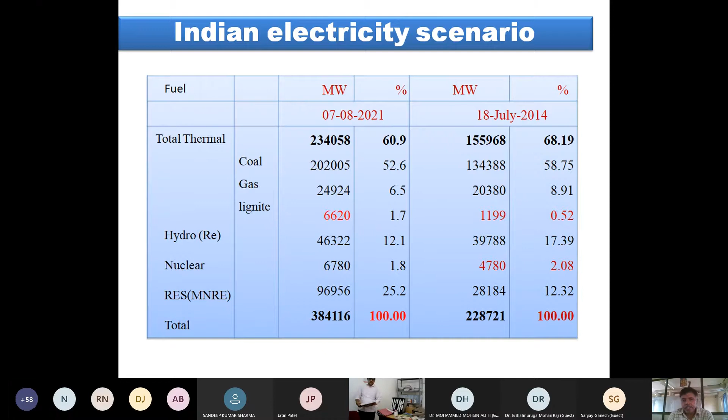Okay, next move to hydro. Hydroelectrical, very good. So in India, according to the level of melting of Himalayas, the height of Ganga - where it is coming from Himalaya: Alakananda, Mandakini, Gangotri, Yamunotri. After mixing of these four rivers, we can call it Ganga. The four Himalaya areas are melting and mixing near Haridwar or Rishikesh, I think Rishikesh, and we are calling it Ganga. The Himalaya height, maybe 3 kilometers from sea level.

How much mass of the water ice is melting, based on that calculation, the maximum potential of electrical energy generation in India across different river basins - maximum capacity is 1,48,701. Up to now we installed already 46,322. Maximum 1 lakh is possible.

That is for that construction, huge catchment area is required, huge investment cost is required. It is practically not that much possible to utilize the entire 1 lakh 48,000. Even though we utilize it, that is not sufficient to fulfill our needs.

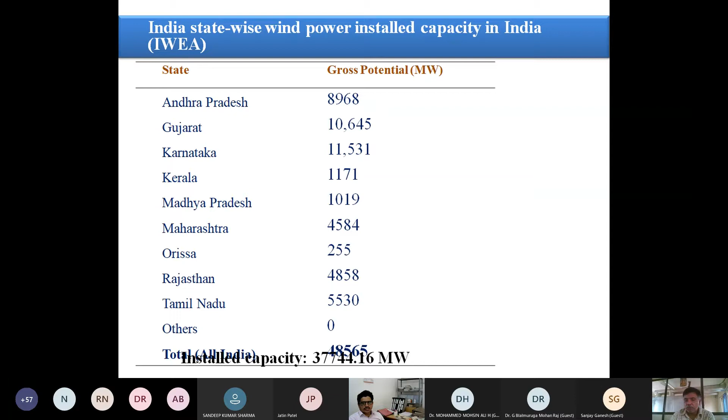Next, Tamil Nadu people very well know regarding wind energy. I think 100% windmills are available in Tamil Nadu - blade manufacturing, generators, 3-4 companies are available in Tamil Nadu. The total gross potential is 48,565. Now 37,744 megawatt is already installed.

Okay, one more option, biomass. That also has maximum capacity of 25,000. So only one opportunity is there, that is solar. In any other method, we are unable to fulfill the needs of future electrical utility. So solar is the only option.

Again, why solar PV is more popular and solar thermal is not popular, we will discuss later. First, solar is the option. So 87.5% of the solar energy we are using for agriculture, forest and housing industry - these areas already utilize 87.5% of solar energy. But in agriculture, the photosynthesis process maximum conversion efficiency is only 2%.

So using 10% of the area, we can produce 8 million megawatt. So even 10% is not required - 1% utilization of solar energy is more than sufficient for our future needs.

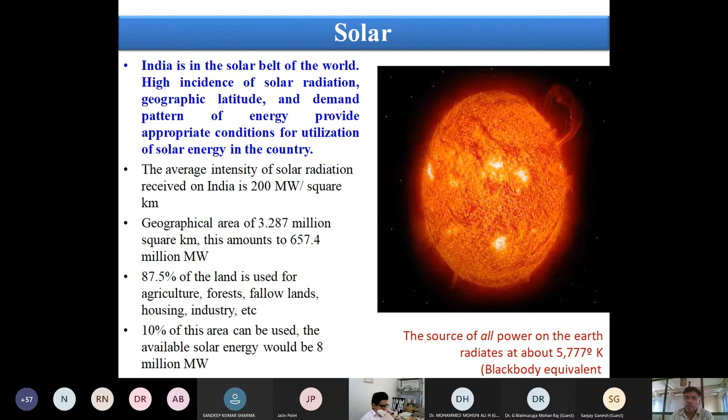So next, once we select a research area, after our PhD, for at least 10 to 20 years it has to be in the limelight, then we can do some work. Every year we can't select a new area. Whatever efforts we made for attaining the PhD degree, at that time itself we are selecting the burning topics, then we can continue our research in our teaching field also. So this is the main reason why I selected solar thermal.

Next, I selected the Exergy tool for that analysis. Before that, whenever we are teaching and discussing thermodynamics, two terms we discuss every time: one, perpetual motion machine of the first kind; second one, perpetual motion machine of the second kind.

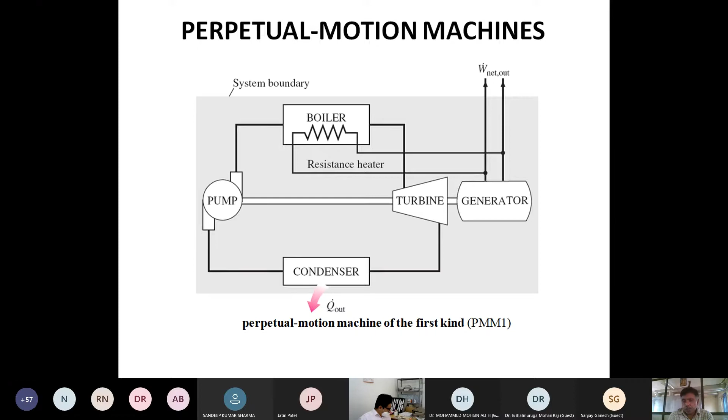So perpetual motion machine of the first kind means it is a violation of the first law of thermodynamics - energy is conserved, but here without input we produce output. That is the statement of perpetual motion machine of the first kind. So without input we cannot produce output - that's the first statement. Second one, perpetual machine of the second kind.

We cannot construct a single reservoir heat engine, or 100% efficiency is practically not possible in thermodynamics - from heat, low grade energy, to high grade energy conversion, 100% efficiency is practically not feasible. If we violate this, it's called perpetual motion machine of the second kind.

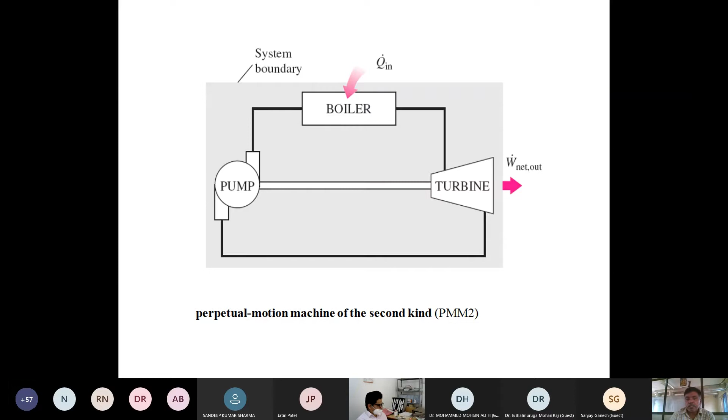So every time we are designing a system or proposing a cycle, we keep in mind energy must be conserved, and even if energy is conserved, whether it is practically feasible or not, the conversion efficiency must be less than 100%. Or if we want to construct a heat engine, at least 2 reservoirs are required. Not only that, the second law explains directional feasibility also.

A cup of hot coffee does not get hotter in a cool room, no doubt - it will cool in the cool room, but does not get hotter in the cool room. Second, by the paddle wheel we can generate heat - in Joule's experiment we are doing that, generating heat. But by supply of heat to the paddle wheel, we cannot generate mechanical energy.

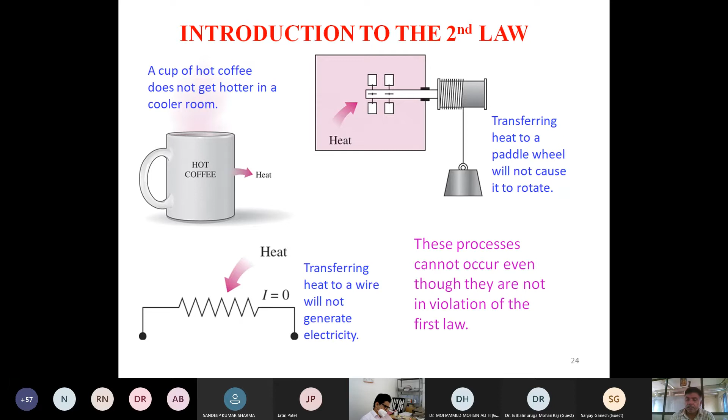By supply of electrical energy through the resistor, we can generate heat. But by supply of heat, we cannot generate electrical energy. So directional feasibility shows energy has quantity and quality.

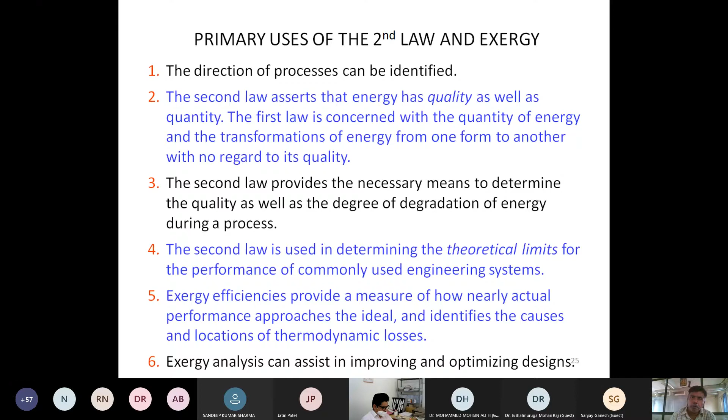Second law analysis can explain the theoretical limits of performance of commonly used engineering devices. Based on the second law, whatever analysis we are doing is exergetic analysis, meaning theoretical feasibility analysis - theoretically how much efficiency is feasible. In a practical case, we can estimate this by exergetic analysis.

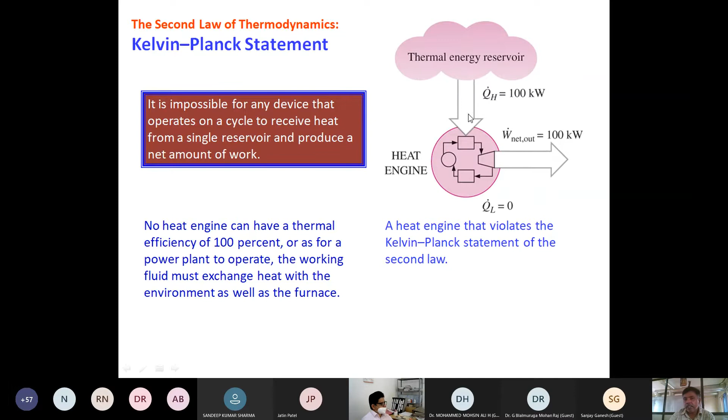As already stated, the Kelvin-Planck statement means we cannot construct a single reservoir heat engine. Next, the Clausius statement: heat cannot flow from low temperature to high temperature unless we are supplying some work through a pump. By using a pump, by external work input, only then can we transfer heat from low temperature to high temperature.

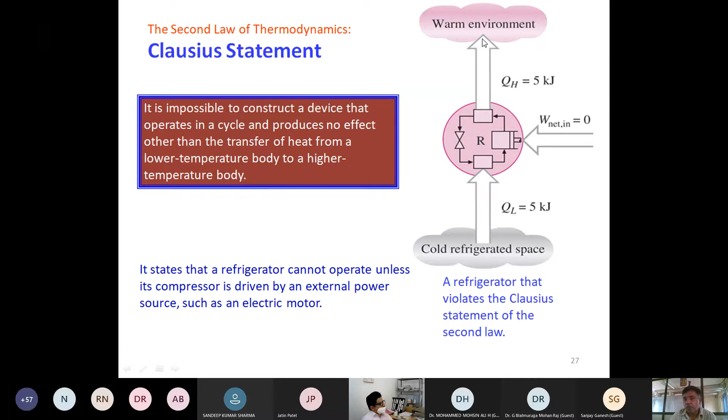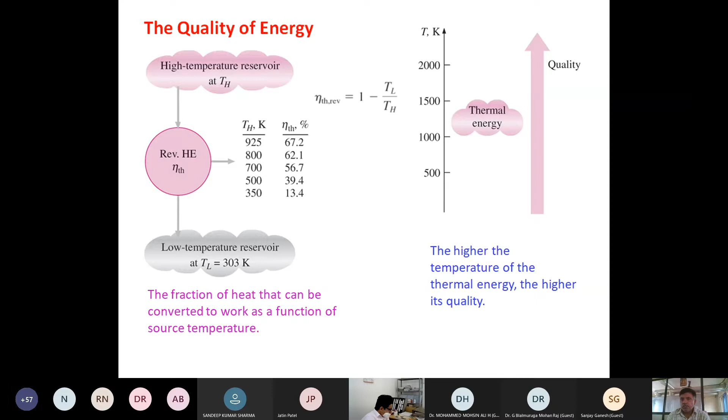Regarding quality of energy, generally as we increase temperature, the available energy is increasing, up to defining the Clausius inequality. Up to that point, if I am increasing temperature, the quality of energy is increased and efficiencies are increasing. But once Clausius realized in 1865 that this inequality is actually a property called entropy, the molecular disorderness - as we increase temperature, heat value is increasing, but molecular disorderness is also increasing.

This is the reversible case and the irreversible case. We are adding entropy generation.

That's why in power plants, in 1950 boiler pressure was 30 bar, in 1951. In 2009, I think 2008, the Reliance Anil Ambani Group made the first installation of a supercritical thermal power plant, with boiler pressure of 221 bar. But boiler temperature in 1951 was only 350 degrees. Now temperature is 580 degrees, with a maximum limit of 600 degrees only. The temperature just doubled, while pressure increased at least 6 to 7 times higher than 1950s pressure.

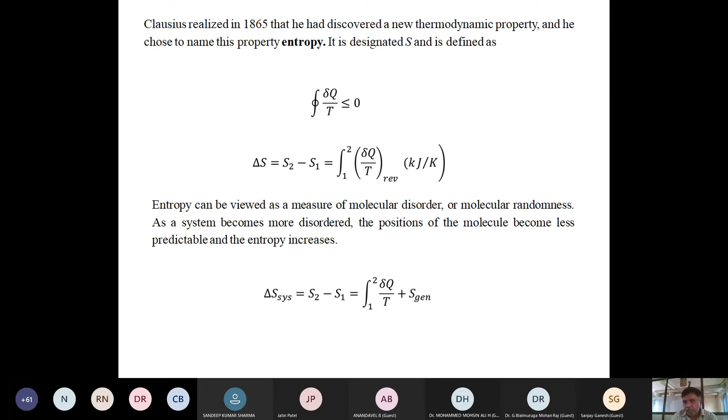Why? Because if I am increasing...

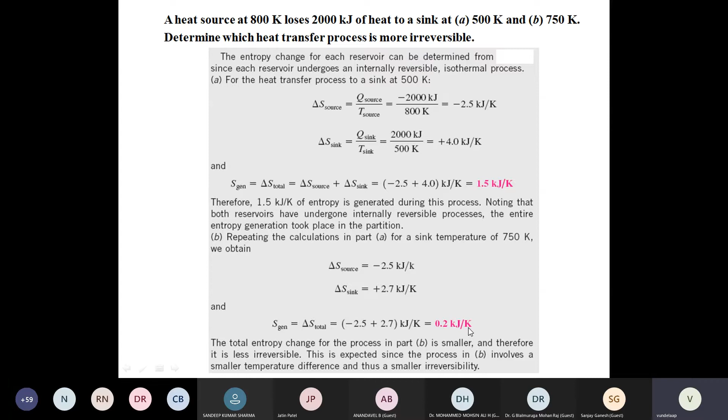So it means less temperature difference will give more available energy. That's why in olden days majority of water heaters were biomass based water heaters. Why? Because biomass combustion gives temperatures of 400 to 500 degrees, but the hot water temperature required is only 40 or 45 degrees. That much temperature difference is there, and because of that, we are losing more available energy.

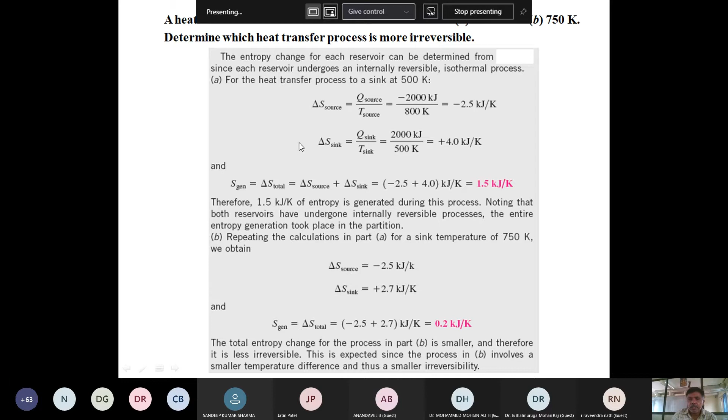That was replaced in the 1980s. MNRE, Ministry of New and Renewable Energy, introduced subsidies for solar water heaters. In solar water heaters, flat plate collectors or ETC tube collectors have temperatures of 50 to 60 degrees, while utilization temperature is 40. So reducing the temperature difference delta T means reduction of entropy generation will take place, and available energy is increasing. This is the second output of second law analysis.

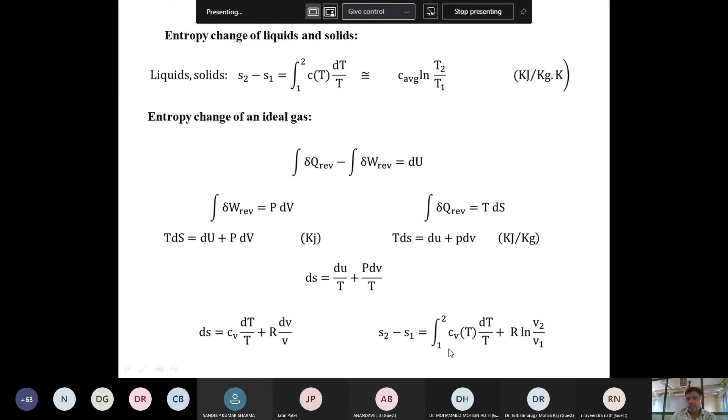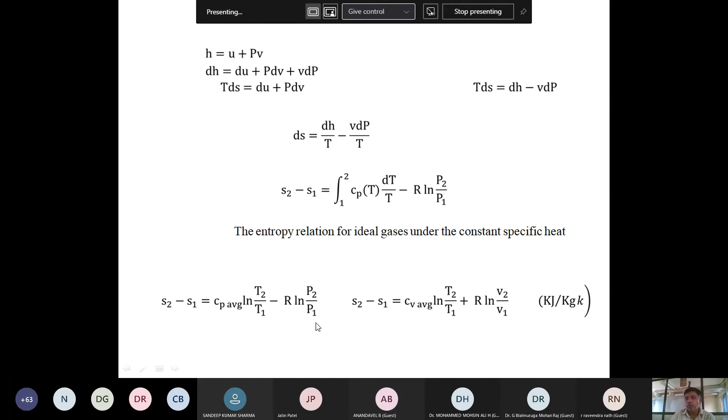Then, entropy for a reversible process - the equation of entropy we already derived for solids and liquids, and for non-flow gases in a non-flow process: integral of Cv into dT by T, plus universal gas constant R into ln(V2/V1). Or for a flow process: Cp into ln(T2/T1) minus R ln(P2/P1), for a reversible process.

For an irreversible process, some more generation term we want to add. So finally we reach why we selected second law analysis - it means we can achieve a realistic outcome based on the theoretical analysis. That's why we selected Exergy as a tool.

Then, what is Exergy? It is the useful work potential of a given amount of energy at some specified state. What is that specified state? For example, at 1000 degrees of temperature and 5 bar pressure, some energy is there - that is the specified state, relative to the dead state.

That state relative to the dead state means that is the environment state. That dead state condition is always changing, from area to area.

One best example I will give, it may be useful for explaining to students. Suppose a student has 10,000 rupees in his hand, pocket money like that, and wants to save it in different banks - he may move to HDFC Bank, ICICI Bank, SBI Bank, or Grameen Bank. Students commonly move between different banks.

So in any bank, if you have 10,000, they will open your account, no doubt at all. Then your energy value is 10,000 rupees. But after depositing, depending on the bank, the withdrawal capacity is changing. Suppose you open the account in HDFC or ICICI Bank, something like 4,000 minimum balance is required. So your available money is only 6,000. If you want to extract the remaining 4,000, your account has to close.

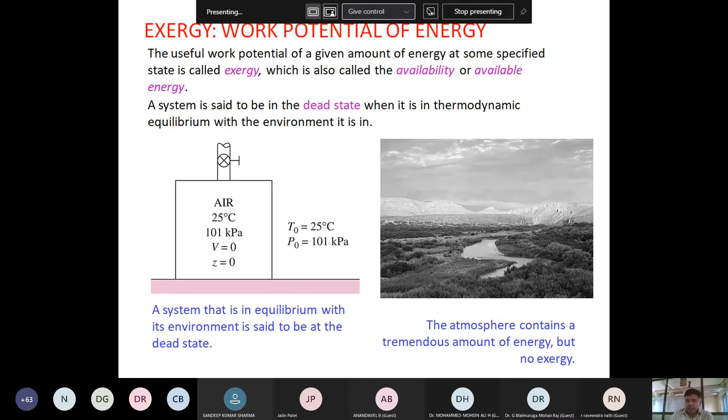So Exergy, best example, it's a combination of energy and entropy. Energy is the capacity to do work; Exergy is the capability to do work. Anergy is a non-available energy. How we calculate that energy is important. Whether that non-availability can be reduced by changing the process or not, that testing is required. That's why we are doing exergetic analysis for all thermal systems: for changing to a different process, how we can reduce the unavailability.

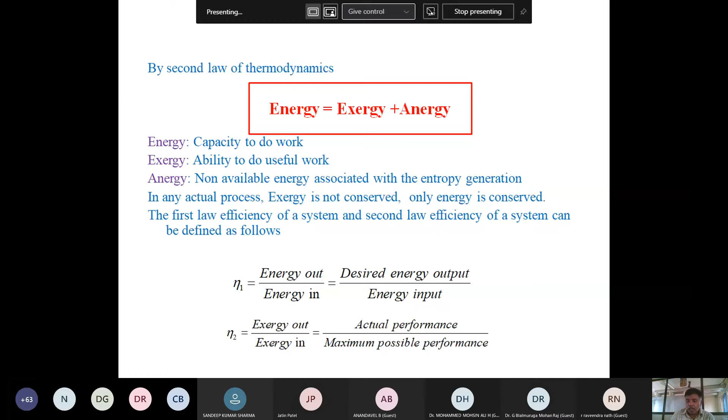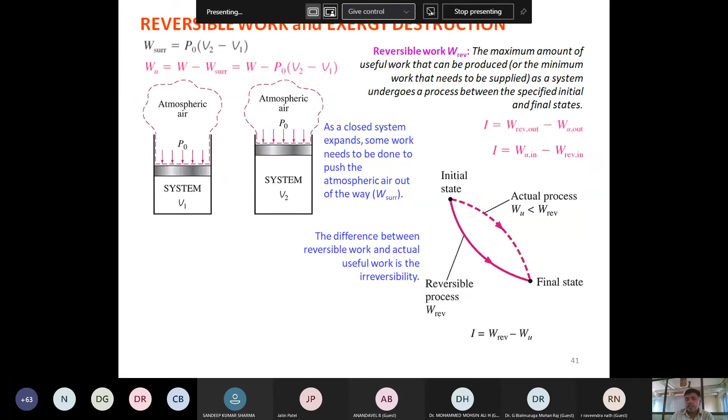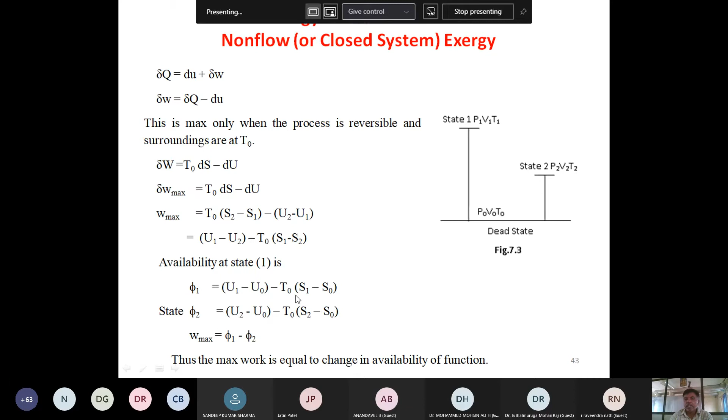These are the efficiency equations. All the equations are there. So energy is conserved, entropy is generated, exergy is always destroyed. For high grade conversion of energy, like potential energy to mechanical energy, the unavailability is negligible. For a non-flow process, the available energy considers internal energy: internal energy of current state minus internal energy of dead state minus T naught into entropy of current state minus entropy of dead state. If you consider the piston work done, then we subtract P naught into V2 minus V1.

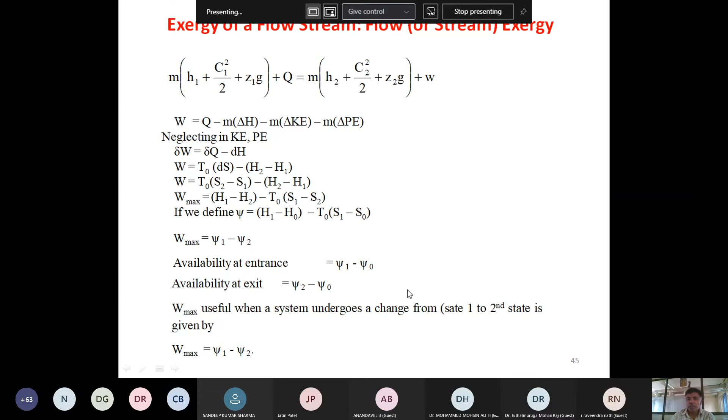For steady flow process, which we mostly use for power plants, the basic equation: mass with some energy is entering. For entering, it performs some work on the system, so flow work, internal energy plus PV, enthalpy, kinetic energy, potential energy. If you supplied heat, again some mass is leaving the system with enthalpy, kinetic energy, potential energy. If by leaving they performed some work, then we add work. This is the steady flow energy equation based on the first law of thermodynamics. The Exergy equation is the same for availability from state 1 to state 2; the only difference is the maximum useful work. This basic equation we are using for analysis of power plants.

So you see how we calculated the Exergy. Suppose solar energy is available at 5400 Kelvin temperature. Then it reaches the earth, and we are consuming it in different processes. Some loss is taking place. This loss maybe we can avoid by changing the process. In our analysis we can cross verify how we can change the process to reduce the losses.

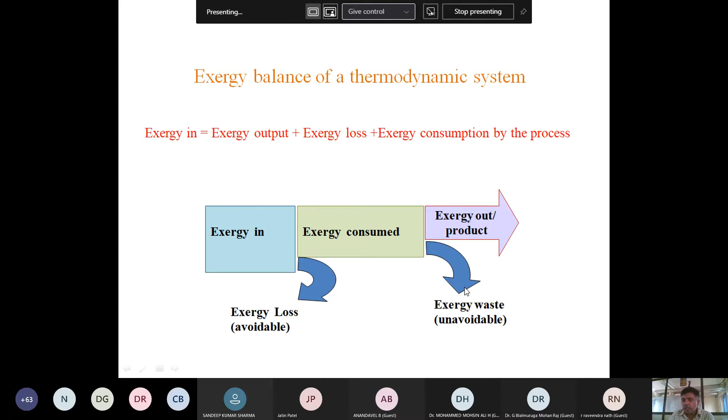The second one is Exergy wastage to the ambient. This one is unavoidable. Why? Because the ambient condition is also the dead state condition, and our Exergy loss is also at dead state condition. This is unavoidable; this one is avoidable. How we can avoid it, we can explain. These are the equations, everything available in our papers. You can search Exergy, maybe V. Siva Reddy or SC Kaushik, like that. You will get the publications.

Now, I think that's why we selected the Exergy tool and why we selected solar. Move to today's topic, exergetic analysis of a solar thermal power plant. Here we selected a 50 megawatt parabolic trough solar thermal power plant.

This one in 2009 I started the analysis. I think in 2010 or 11 I published the data. At that time in India there was no power plant. So from published data only we selected the parameters, the design parameters. And for the Indian atmosphere, from NREL, National Renewable Energy Laboratory, the last 4 years of solar data is available. Anyone can download it. By using that data only, we analyzed this model.

We placed the data for a high solar intensity area, Jodhpur, and a low solar intensity area, Delhi, because at the time I was in North India, so I selected the two areas. First of all, generally in a parabolic trough, what we call a collector is a combination of modules. You see, these are the modules, 12 modules. One collector is a combination of 12 modules. For one module width we selected the commercially available width of 5.76 meters.

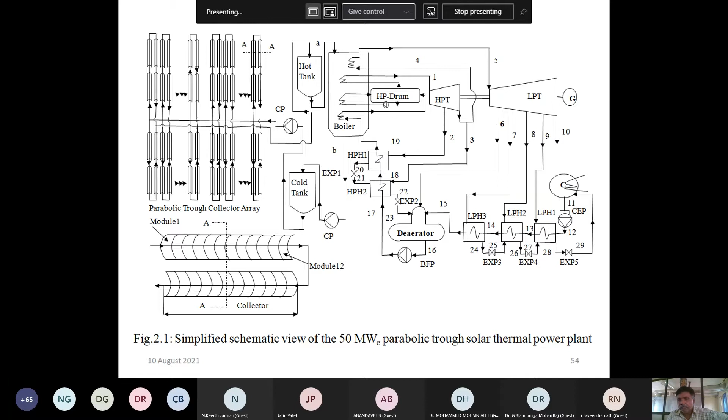This is the general thermal power plant. You see, a reheat, regenerative, superheated Rankine cycle thermal power plant. Not supercritical; superheated, reheat, regenerative. For the regenerative operation, two high pressure regenerators, one open regenerator for deaerator purpose, and three low pressure regenerators. And reheating: after the high pressure turbine exhaust, we reheat the steam for further expansion in the low pressure turbine, reducing the moisture content in the end stage of the turbine blades. This is the single one.

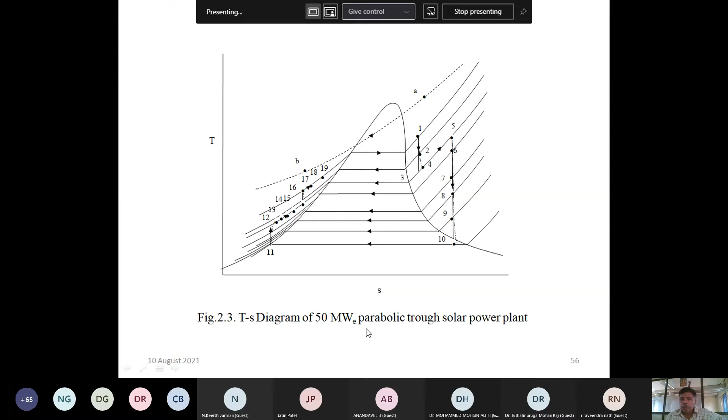Receiver, evacuated tube. These are all data collected, and this is the TS diagram of the 50 megawatt parabolic trough solar thermal power plant. The basic equation I already mentioned, only the steady flow energy equation we are using for determination of the power plants. Here, the main beauty of the analysis: we considered reduction of the load and the reduction of performance efficiency from a 1958 publication, how the high pressure and low pressure turbine efficiency will reduce, how pump efficiency will reduce, and how generator efficiency will vary with the load. Realistic output is our target. By theoretical analysis, we want to achieve the realistic performance efficiency.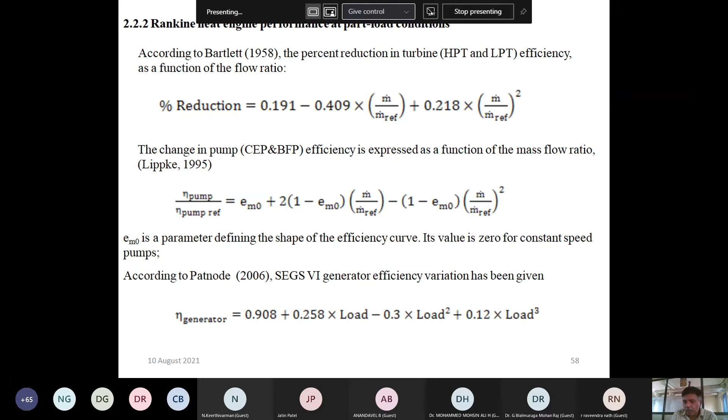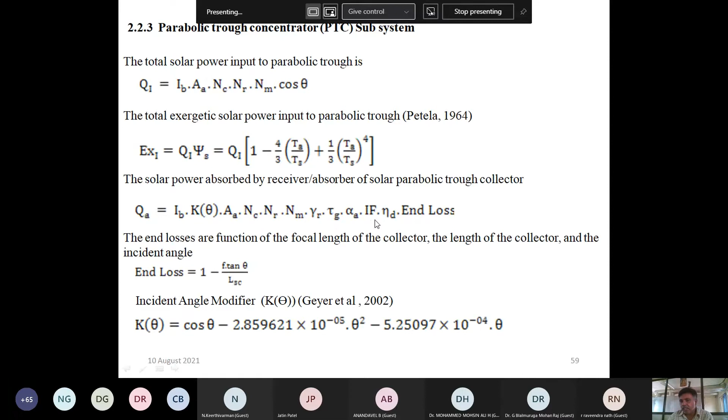Then this is the heat from the source of solar beam radiation. We all know for concentrated collectors we use only beam radiation; for flat plate collectors we use diffuse radiation. And the area of the collector, number of collectors, number of rows, number of modules per collector. Generally we selected 12 modules, universally accepted; the majority of power plants contain 12 modules only. And the cosine losses. Then the exergetic input value of the source; Petela published this equation in 1964, and we use that one. Then how much is absorbed, reflectivity, transmissivity, absorptivity, and end losses. Everything we considered.

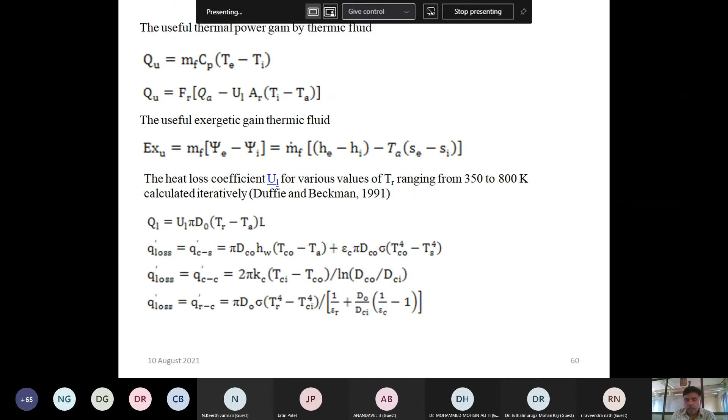So this basic model, the same total paper I published in, I think, Energy Journal, you can cross verify. For the design considerations, at the time we considered 2009 published data: absorber tube outer diameter is 70 mm, absorber tube inner diameter 65 mm, glass envelope 115 mm, and glass envelope inside diameter 109, so the thickness of the glass is about 6 mm.

And for Jodhpur, as I mentioned, high solar beam radiation of 870 watt per meter square, so the number of collectors we selected was 4 per series. For the same system installed in Delhi, we increased the number of collectors to 6 because the average solar beam radiation availability is only 620. The width of the module, as I mentioned already, is 5.76. The length of every module is 12.27, but the mirror length is only 11.9. The ambient temperature we selected is 304, and the incident angle, and the focal length is 1.71. The tracking system is a hydraulic drive.

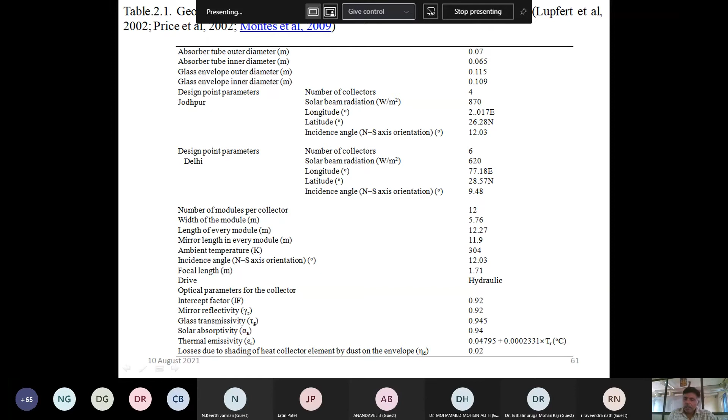Next, mirror reflectivity, glass transmissivity, everything in a realistic manner we consider. Next, the power plant operating parameters you can see. The extraction at the end of the first stage, second stage, third stage: 2 high pressure regenerations, 1 open feed water heater, and 3 low pressure regenerations are there.

For extraction, where it is extracting, the percentage is 0.5 into high pressure, and at the end one stage is completing. After the stage only we can extract the steam. Next, after the next stage of the extraction, like that the extraction percentages of the high pressure, the extraction stages are there. Given any designed power plant, you open the design data book of power plants, you will get it, because the exact pressure they will not give. If I change the high pressure, the extraction pressure is also changing.

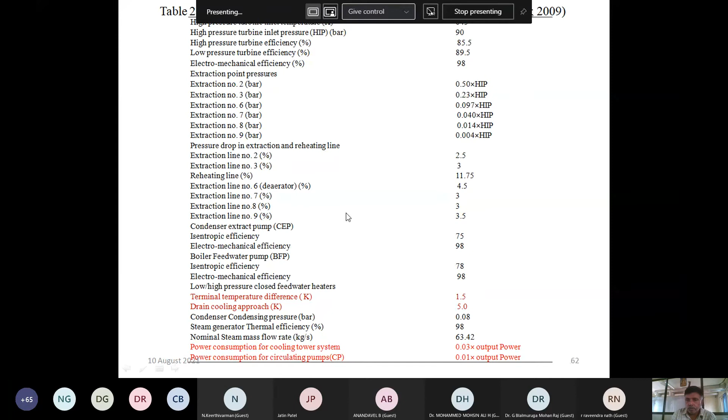So that is only the collected data. I did not do anything. Whatever the 2009 published data is there from the journal, I developed the model and did the exergetic analysis and energetic analysis. So the collector receiver area has low exergetic efficiency, and the overall plant efficiency, the energetic efficiency, is 24%. The exergetic efficiency is 25.81.

Generally, exergetic efficiency we expect to get a lower value, but according to the Petela equation, solar energy at the source is a high value, 5400 Kelvin, but when it comes to the earth the value is reducing. Because of that only a slight variation of the exergetic value is coming. Then whatever the model, why? Because practically there is no validation, but theoretically, first model validation is required. Our model compared to the published data, we got almost nearer values.

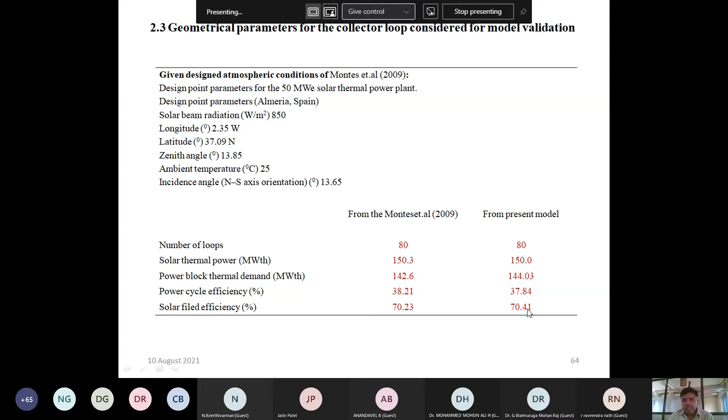So then we want to do modifications. What are the modifications that can take place? Already I mentioned we can't increase the temperature. If you increase the temperature, the available value is reducing. So we can increase the pressure. The possible allowable increase of the high pressure we calculated. What is the limitation?

The end stages of the turbine blades, the dryness fraction. That is our target. More than 0.9 dryness fraction we want to maintain. Wilson line, we call it the Wilson line in power plants. If you maintain more than that dryness fraction, damage of the turbine blades we can eliminate.

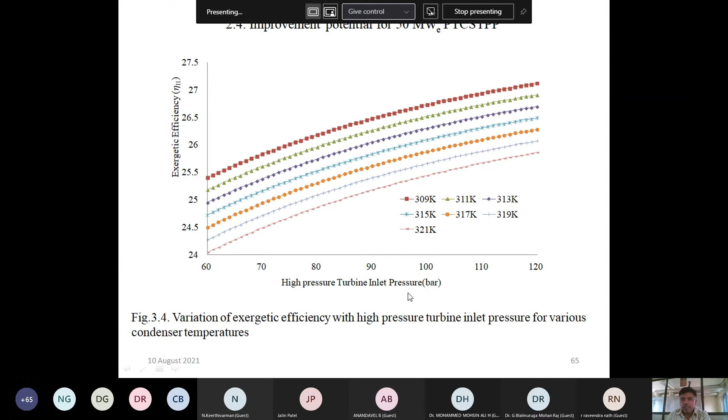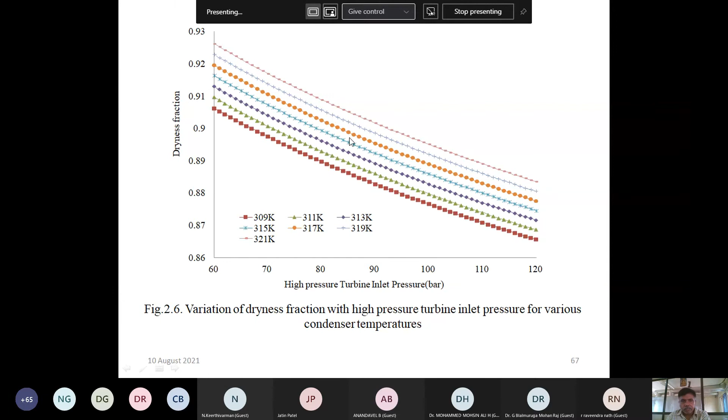So with that target, we analyzed different sink temperatures: as we increase the high pressure turbine pressure, how the exergetic efficiency is increasing, and how the dryness fraction is reducing. So the optimum turbine pressure: in the earlier condition, the published data is 90 bar pressure. Now up to 105 bar pressure we can increase without changing any operating parameters. Then we extracted the operating parameters at each stage of the extraction process, and we determined the entropy, exergy value and energy value.

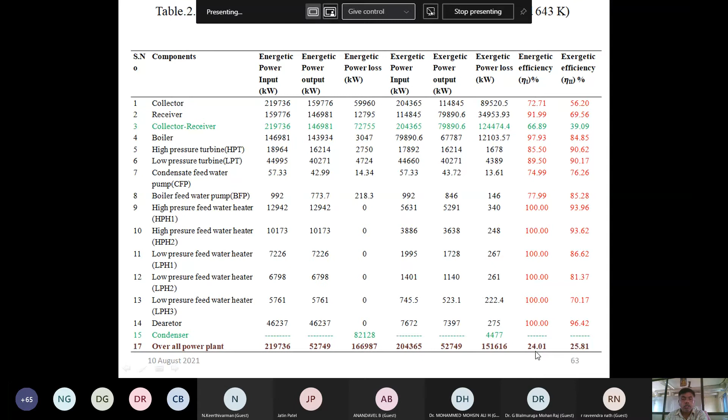Then we calculated the overall efficiency of the power plant. The overall efficiency of the power plant we got is 26.2. The energetic efficiency is 24.75. In the earlier condition, the model is 24 and 25.81. So almost 1.2 to 1.4 percent of the efficiency we increased by enhancing the inlet pressure.

This enhanced efficiency power plant cycle, if I run it in the location of Jodhpur, this is the Jodhpur solar radiation variation from morning to evening, so 8 a.m. to around 8 p.m., but up to maximum 5 to 6 p.m. is more than sufficient. So how the solar radiation varies per month, you can see in the month of August less solar radiation we are getting. The peak solar radiation we are getting in the month of February.

Generally we assume high solar intensity will come in summer, but in general high solar intensity comes in winter, but the length of the solar day is less in winter. Why we get high solar intensity in winter is that condensation of the polluted particulates takes place in winter. So a clear sky condition will occur at noon time.

So the solar constant is not changing. 1353 watts per meter square of beam radiation is coming from the sun to earth. If clear sky, zero pollution, at that condition we can get the highest beam radiation. But that highest beam radiation possibility is only available at Jodhpur. You can cross verify the solar radiation data on the NREL website.

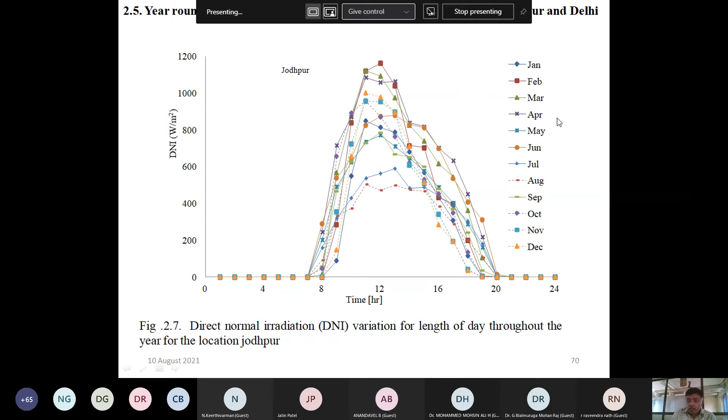Next, the wind velocities, the dry bulb temperatures, how the dry bulb temperatures are changing the entire day. Next, Delhi. Delhi also like that. You can see in Delhi in November we are getting the peak solar radiation. There, February we got the peak solar radiation. Here, November we got the peak solar radiation, and least in August in both cases, because in monsoon conditions, August has the least beam radiation due to high cloudy conditions. These all values are beam radiation, not global radiation. So beam radiation availability in August is very less.

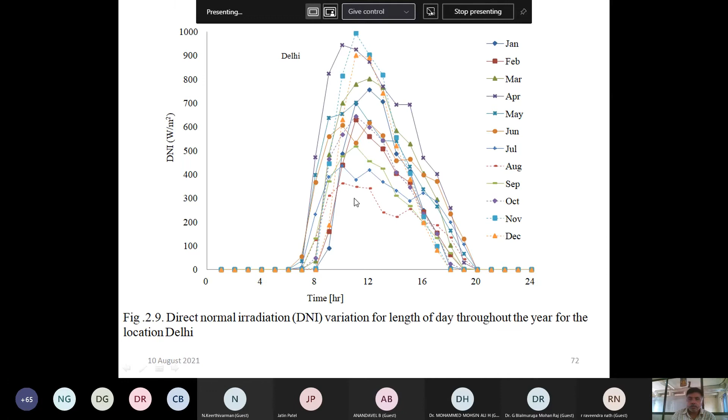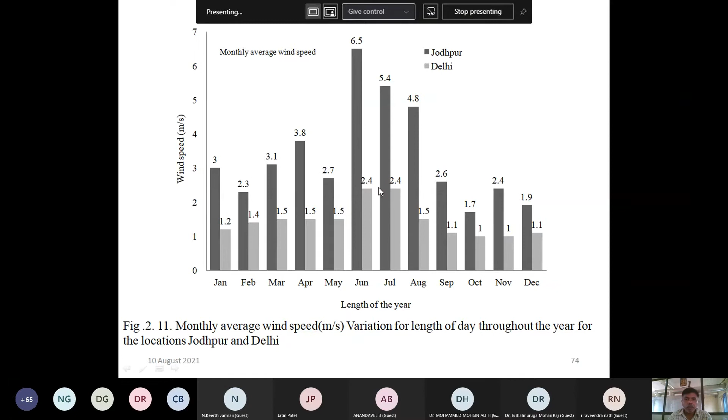Then monthly average wind speed. In Jodhpur, the collectors are reduced for the same 50 megawatt production, but the drawback of Jodhpur is that wind velocity is high. So the structural cost of the collector is increasing in Jodhpur compared to Delhi. Delhi wind velocities are very low compared to Jodhpur. Jodhpur wind velocities are high.

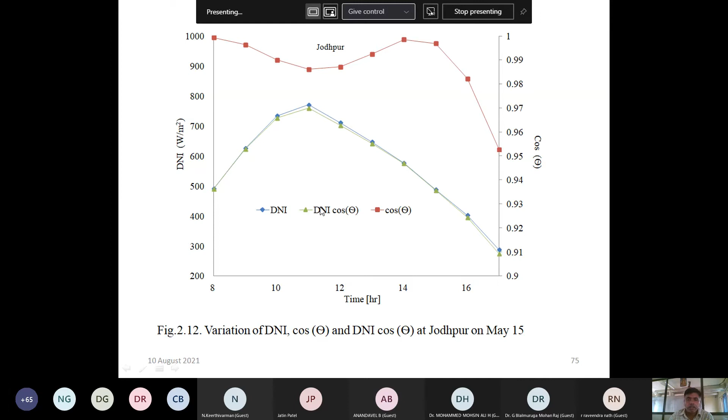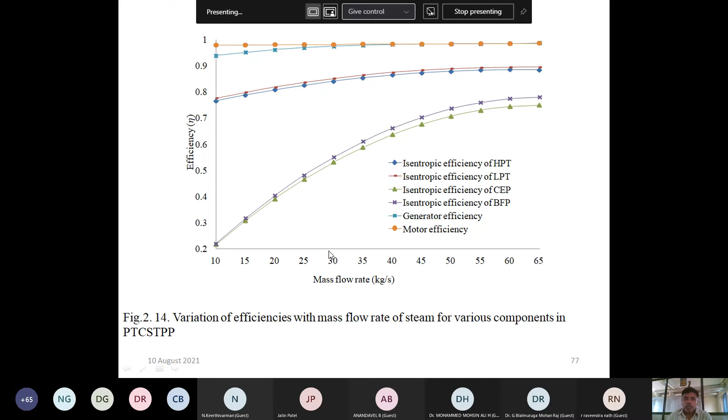Then after considering cosine losses, what is the end beam radiation? Why? Because we are doing single axis tracking for the parabolic trough. That's why we want to consider the cosine losses for Delhi also. Then efficiency variation of the high pressure turbine, low pressure turbine, boiler feed water pumps, generators and motors. What is the efficiency variation with respect to load? Load means the mass flow rate of the circulating fluid. We are changing it, so load will change. According to load, the variation of the efficiencies we considered.

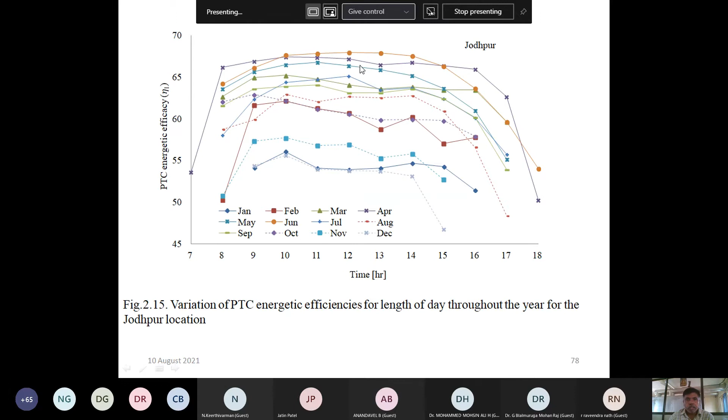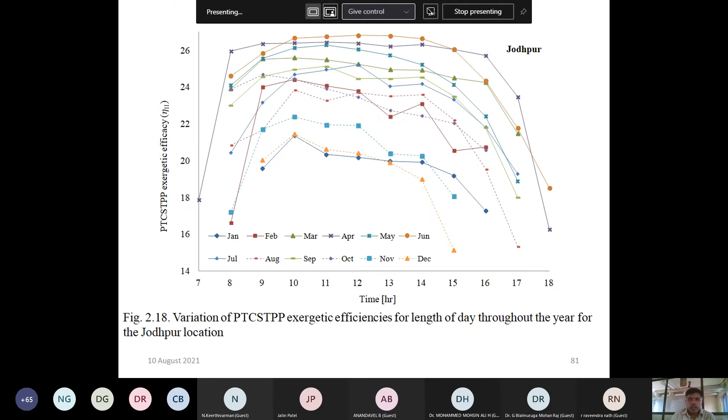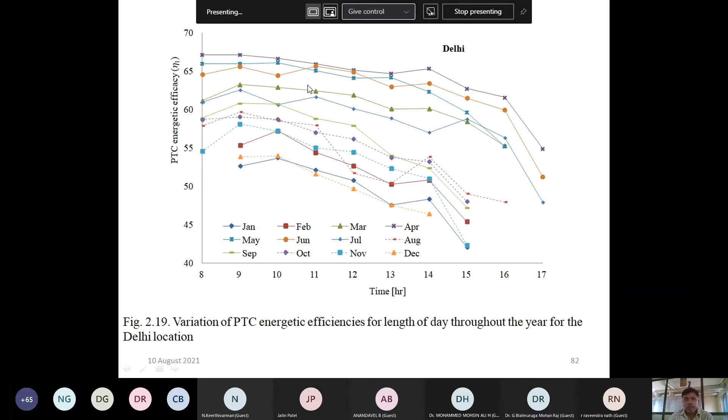Then we calculated for the entire year the efficiency variation of the parabolic trough, the energetic efficiency and exergetic efficiency. In December, you see very low. Next December, November, and October. The high we are maintaining in June. April, May, and June, high efficiencies we are achieving for Jodhpur. Total plant efficiency is also calculated. This is the total plant efficiency. Coming to Delhi, Delhi also in April, May, June. These 3 months, the length of the day is high and overall efficiency is also high in both conditions.

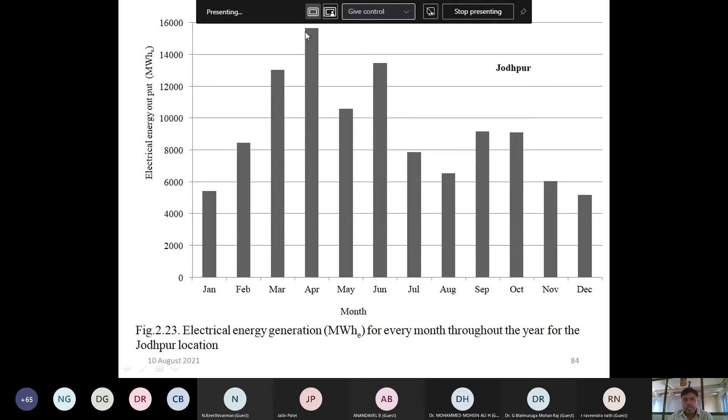Next, the electrical energy generation capacity. These all are theoretical analysis. The electrical energy generation capacity month wise: March, April, May, June. These 4 months we are getting high electrical energy generation units. Here also April. In both cases, in April the length of day is high and the solar radiation is also at the design value, for Delhi 650 watt per meter square and for Jodhpur more than 850 watt per meter square. So that's why in April we are generating high electrical units.

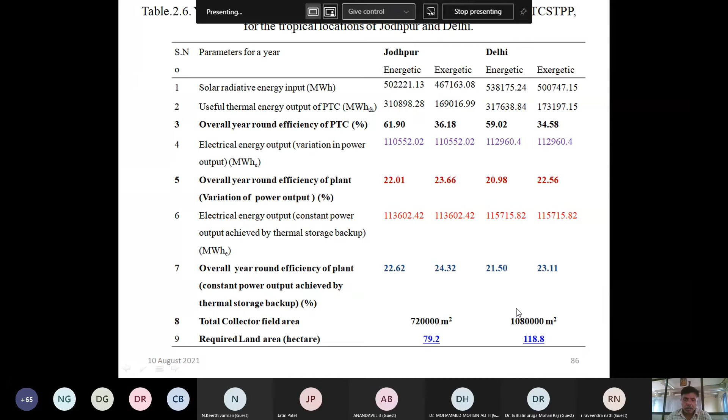So the comparison of Jodhpur and Delhi, the variation of the efficiencies, the year-round efficiency. The designed efficiency of the modified parabolic trough system: exergetic efficiency is 26%, energy 25%. But for year-round running, the overall efficiency of the plant is reducing because in August, September, the operating temperatures are reducing. But the average overall year-round performance of the system is this one. And total land area requirement: for the same 50 megawatt power plant at Jodhpur, 80 hectares of land is required. For the same capacity at Delhi, the land area requirement is high, 120 hectares. So efficiency, number of units generated and land area requirement we calculated.

Next, any analysis will not be complete if we are not publishing the economic analysis. Unit generation cost is important. If we publish data without unit generation cost, there is no use. Even though your efficiencies are good, if the unit generation cost is going to 20 rupees or 30 rupees, no one is ready to accept your analysis. So that is the main important thing. Then we did economic analysis of the solar power plant. Here we calculated the unit generation cost.

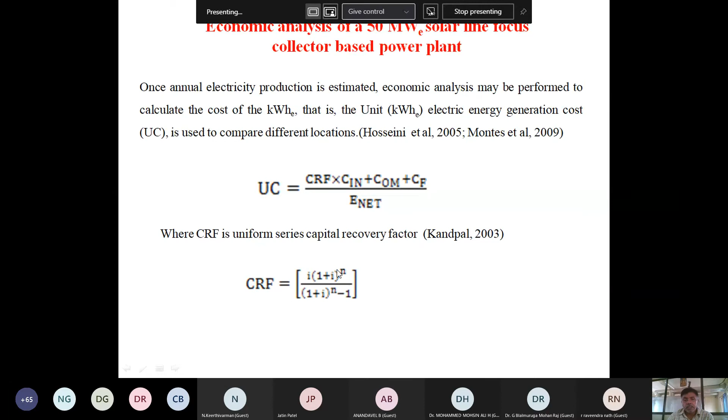This is the CRF, the capital recovery factor, proposed by Kandpal, IIT Delhi professor, in 2003. It is i into (1 plus i) to the power n, the life of the plant, divided by (1 plus i) to the power n minus 1. This is the capital recovery factor. Capital investment, operation and maintenance investment, and fuel investment divided by how many electrical units are generated gives the unit generation cost. Based on the CRF, the unit generation cost increases. If the interest rates on the money we borrowed are high, unit generation cost will increase. If the life of the plant is low, unit generation cost also increases.

So here, the System Advisor Model. This is also on the NREL website. From the tool we can extract the data, such as site improvement cost per meter square, the general cost of the collector, storage system, and the power plant cost. These values I extracted from the System Advisor Model, available at the National Renewable Energy Laboratory. Then I know the site area, and for Jodhpur and Delhi, what is the cost.

Indirect cost also. Engineering, procurement, construction cost, generally the limit is 11% of direct cost. This is our Indian power plant benchmark cost analysis, 11% of direct cost. And project, land and miscellaneous costs, generally 2% of direct cost. Then this is the total direct and indirect cost of power plant installation for Jodhpur and Delhi.

Next, operation and maintenance cost. These are also fixed costs and variable cost by the generation. The fixed cost is 3,500 rupees per kilowatt per year. 3,500 rupees we want to spend on operation and maintenance cost. And variable cost by the generation, 150 rupees per megawatt hour. So this operation and maintenance cost we calculated. Then the total megawatt operation and maintenance cost is this much.

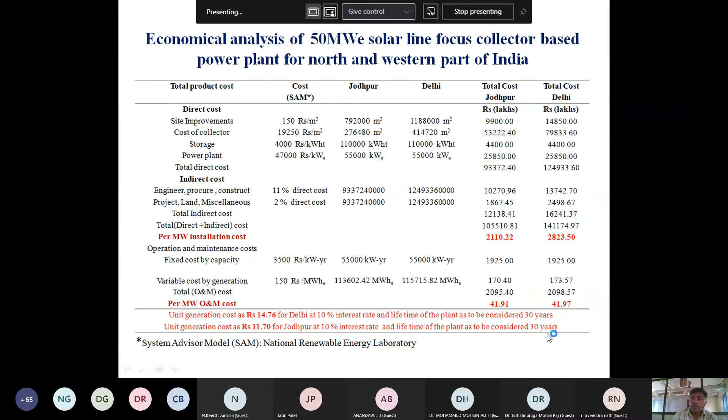Then the unit generation cost we calculated. For Delhi, 14 rupees 76 paise at 10% interest rate and 30 years life. For Jodhpur 11.7 rupees, 10% interest rate and plant life 30 years. And I have not considered any government subsidies or import duty exemptions. In a realistic manner, if anyone constructs the 50 megawatt plant, then what is the electrical energy generation cost?

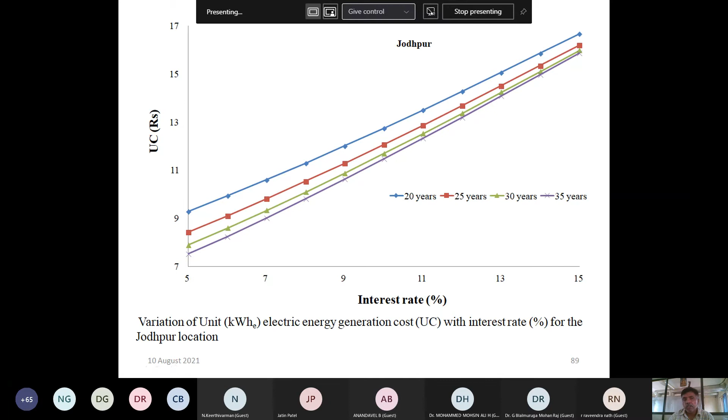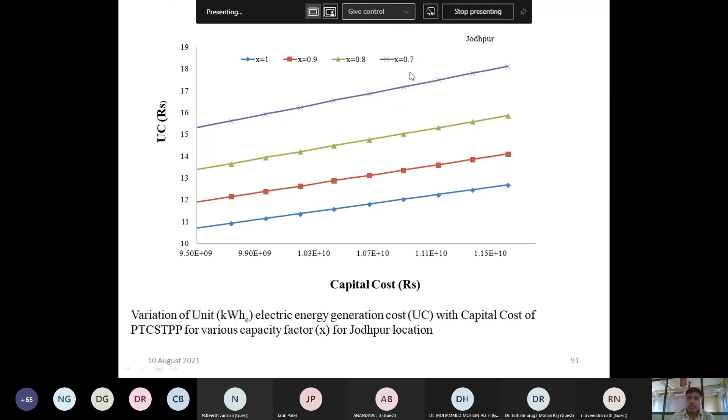This one is also published in the Renewable and Sustainable Energy Reviews journal, the economic analysis also. So how unit cost is varying with respect to interest rate, I already mentioned. Interest rate and capital cost, with the load factor: if it is running at 100% load, 90% load, 80% load, 70% load, operation maintenance cost, capital cost.

So finally the conclusions are, at 10% interest rate, a normal acceptable rate, and 30 years lifetime, parabolic trough unit generation cost if we installed in Jodhpur is 11 rupees 70 paise and in Delhi is 14.76. But at present, in 2021... I analysed at the time of 2009, solar PV power plants unit generation cost was 14 rupees. The Indian government was ready to purchase at 14 rupees.

Later it reduced to 7 rupees. Now the solar PV power plants unit generation purchase is 2 rupees 65 something. Drastically reduced. At that time we compared with solar PV also in 2009, not now.

Then same method, there are solar concentrated systems of 3 types: parabolic trough, parabolic dish, and central power tower. Central power tower is nothing but a big split dish. That's all. From far it's a point-concentrated parabolic dish only. The central power tower uses heliostat plates. One reflector area is 10 meter by 10 meter. All reflectors maintain dual axis tracking, and at the center the receiver is there.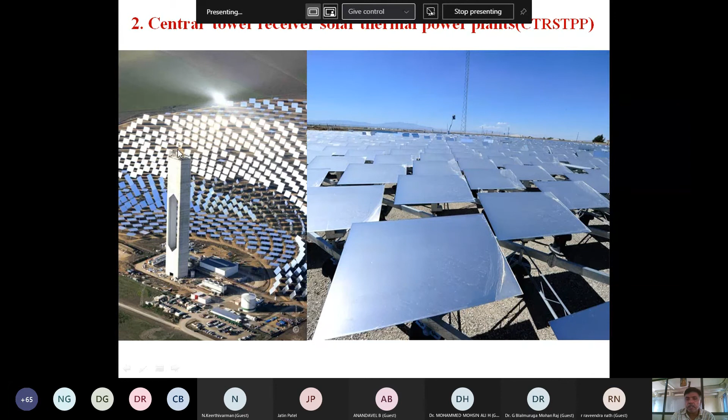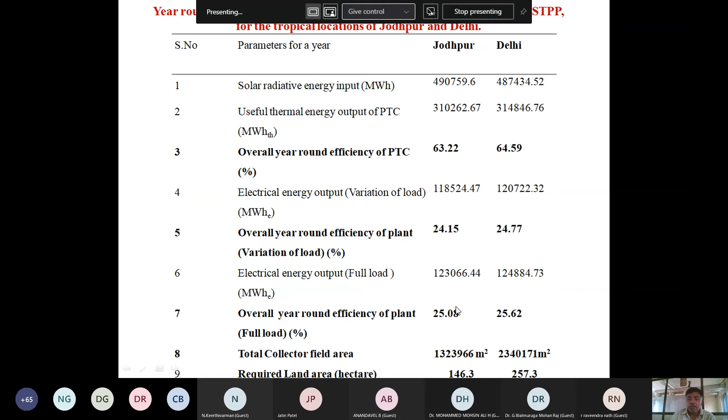That 20 to 30% is reduced beam radiation, further reflection means further reduction is taking place. But for comparison purposes we analyzed the system. If we run a 50 megawatt system in Jodhpur and Delhi, the land area requirements are increasing drastically compared to parabolic trough.

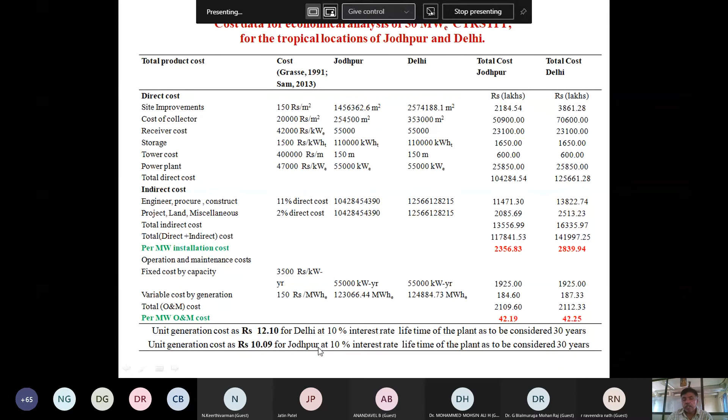But overall plant efficiency is increasing and the unit generation cost is reducing. Delhi is 12 rupees and Jodhpur is 10.09. I fixed the interest rate and number of life of the plant.

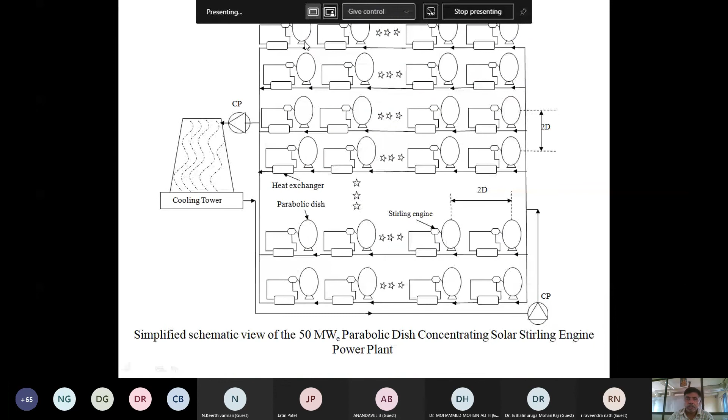Then parabolic dish system - why? Because IOCL in India is the only organization working on parabolic dish Stirling engine based power plants, a 25 kilowatt system with a single unit capable of running 25 kilowatts. IOCL is doing major research on the engine, reflectors, structure and structural resistance, associated with IIT Bombay and other R&D organizations. So in that condition, we are connecting 25 kilowatt parabolic dishes in series and parallel to achieve 50 megawatts.

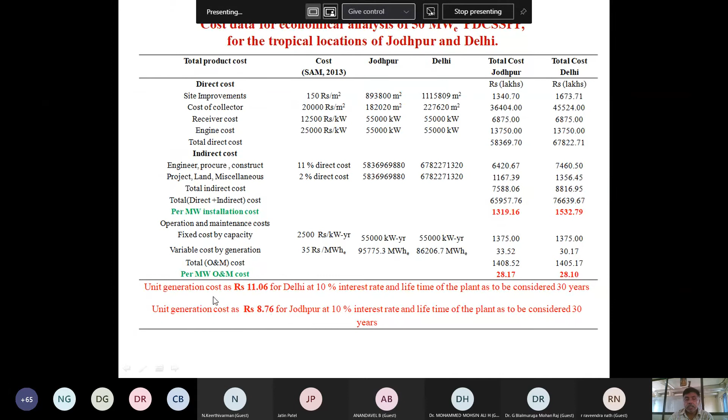For comparison of unit cost generation and land area - this is the land area requirement. The unit generation cost is very low compared to parabolic trough. Jodhpur is 8.76 and Delhi is 11.06.

So the final conclusions by analysis of parabolic trough, central power tower and parabolic dish: unit generation cost of parabolic dish is very low and land area requirements are also moderate in parabolic dish, especially in India, not overall. The installation cost is too high - 21 to 28 crores for parabolic trough, central power tower 24 to 29 crores, and parabolic dish 14 to 16 crores. That's why IOCL majorly concentrates on parabolic dish.

So by this analysis we concluded solar alone is not practically feasible because the unit generation cost is too high. Then what can we do? If solar is my target to utilize solar energy for power generation, solar alone means it consumes more land area. Second, the efficiencies are low and the investment cost of the power plant is high. So no one will come forward with our proposal.

Then we cross-verified with some more analysis - if solar aided is possible. As I already shown at the start of the lecture in one slide, 60% of total power generation is only from thermal power plants.

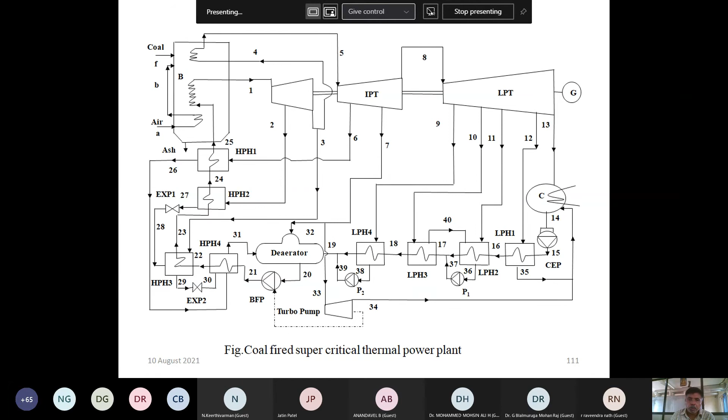Then we did exergetic analysis of the thermal power plant. This source, Solid Fuels by Kotas textbook, I considered from 1984, for calorific value - higher calorific value and lower calorific value. In coal, two types of calorific value exist: higher and lower. If sulfur content is not present in the coal, we consider the higher calorific value. If sulfur content is available in the coal, we consider the lower calorific value, because sulfur condensation will take place if the exhaust gas temperature reduces to less than 160 degrees.

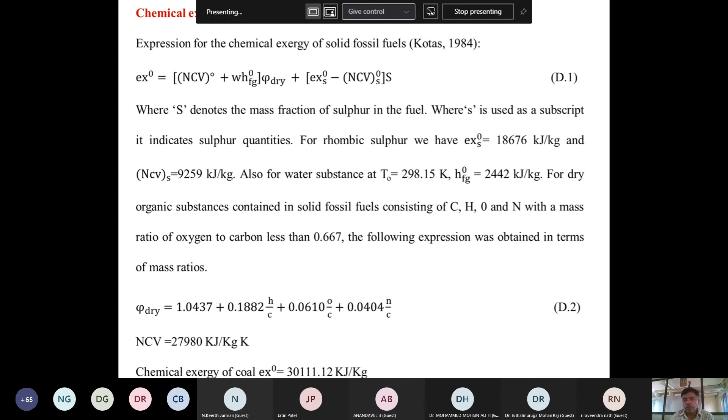If exhaust gas temperature is more than 160 degrees, condensation of moisture in the flue gases is not possible, so that energy we are not gaining. That's why we consider lower calorific value. If sulfur-free coal is used, the exhaust gas temperature is 80 to 90 degrees, so condensation of moisture in the exhaust gas can take place. That energy can be used for boiler feed water heating. That's why we consider higher calorific value.

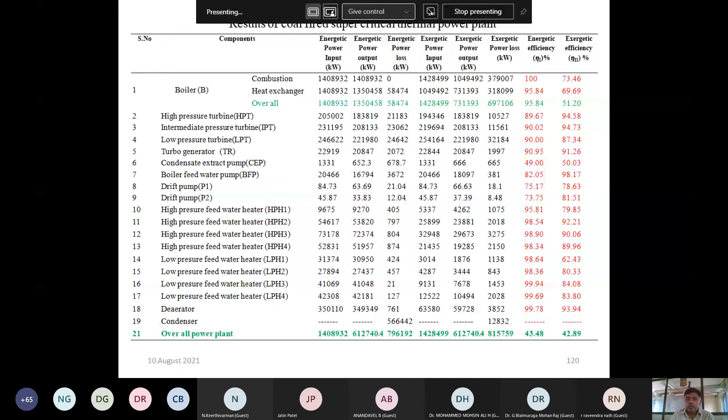Then we analyzed the entire power plant. This is a supercritical thermal power plant. The energetic efficiency we got is 43%, and exergetic efficiency is 42%.

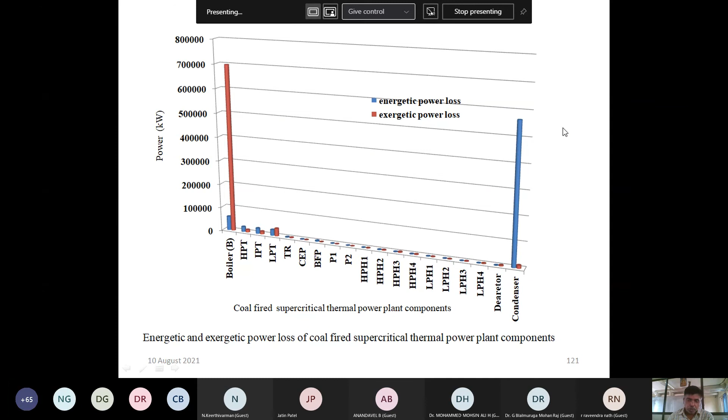The exergetic power loss is more in the boiler, because wherever high temperature difference is available, more losses take place. More exergetic losses and more entropy generation occur in the boiler. But energetically, losses in the condenser appear more, though it is nearer to dead state, so those are not recoverable losses. In the boiler, the losses are recoverable.

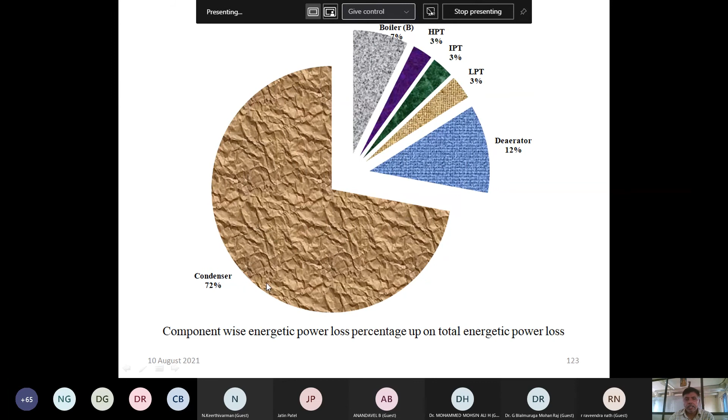If you change the process, by energetic analysis the condenser shows more losses. In exergetic analysis, we can visualize that boiler losses are high.

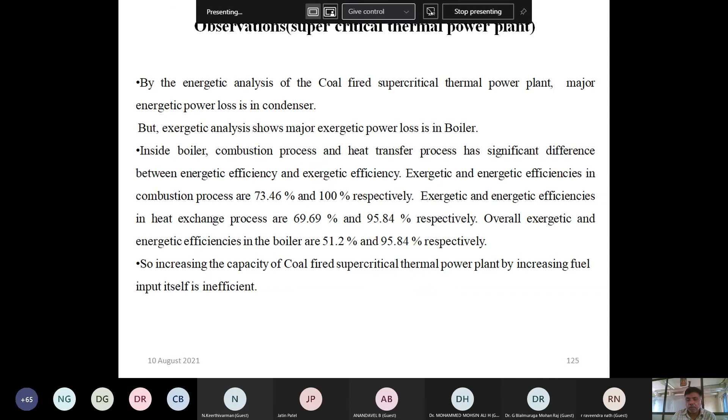So from this conclusion, I want to enhance the capacity of the power plant. Instead of increasing the input to the boiler, we want to consider some other manner, that is, replacement of the feed water heaters by solar water heaters and solar concentrators.

The operating temperature of 250 to 350 is more than sufficient. The substitute for high pressure regenerators may be 250 to 300, and low pressure regenerators 150 to 200. It is easy to substitute with solar collector systems, whether parabolic dish system, heliostat system, or parabolic trough system. We can substitute with these.

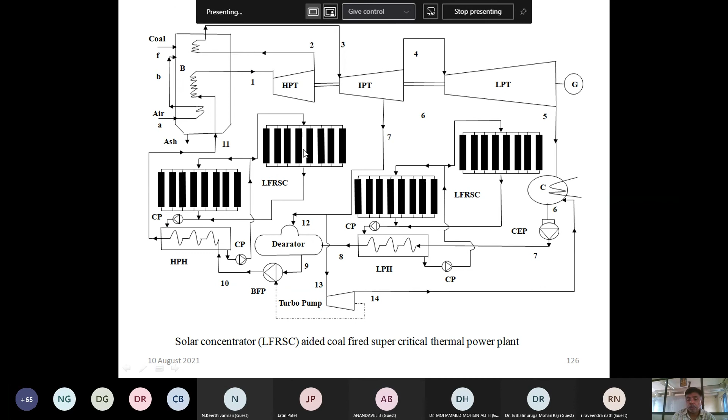Then we calculated, if we replace low pressure feed water heaters with solar aided systems, how much net efficiency reduction occurs. Without solar aided, the efficiency of the plant is 43.48%. But replacing the low pressure heaters, the efficiency is reduced to 38. If replacing both low pressure and high pressure heaters, the efficiency is reduced to 35.75.

Efficiency is reduced because regeneration is one of the best processes for efficiency enhancement of power plants. But this efficiency is much higher than solar-alone thermal power plants. Solar alone thermal power plant efficiency is maximum 25%; per year round working we get only about 23, 22, or 20%. But here the efficiency we are getting is 35%.

So this is one advantage, higher than solar alone, and there is no extra power plant construction needed; just concentrated collector land area is more than sufficient. And we are enhancing the capacity: for a 600 megawatt power plant, we can enhance capacity by 130 extra megawatts using the solar aided option for the existing power plant.

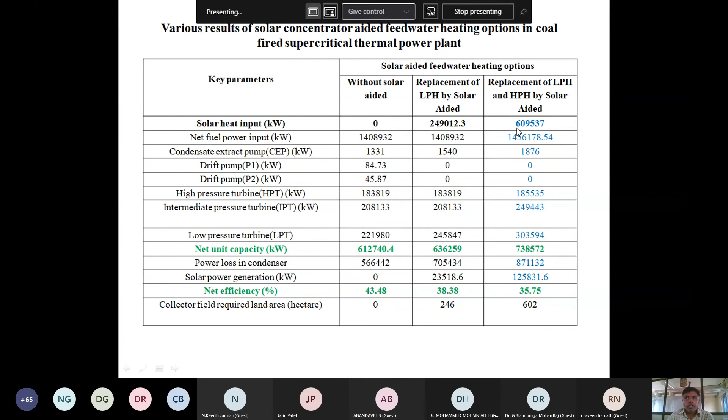Okay, so these are the conclusions.

So at the end, what we concluded is: first we selected solar. Why? Because solar is best; in future there is no other energy source to fulfill the needs of human beings. Second, we selected solar thermal power plant because we are mechanical engineers. As a tool, we selected exergy for the analysis.

But solar alone practicality is very low, because cost of investment is high and efficiencies are low. That's why, as mechanical engineers, we wanted a mechanical related solution. That's why we selected the solar aided option for an existing thermal power plant, replacing the regeneration process.

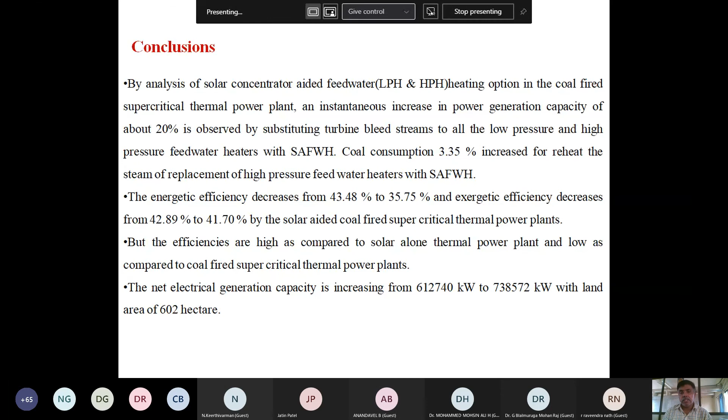So with this I am concluding my lecture. Some of the lectures given by me cover mechanical engineer opportunities, because at present we are facing so many problems; students are not interested in joining mechanical engineering, and they don't know the importance of mechanical engineers, the only engineer who can give solutions in all types of fields.